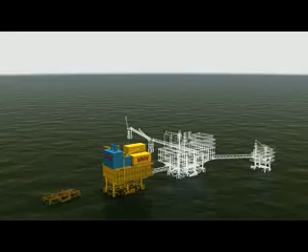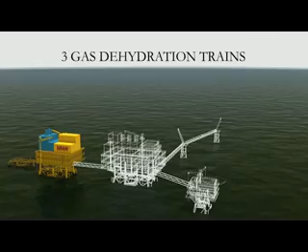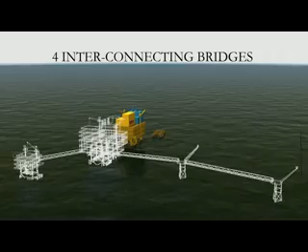Process Platform and Living Quarters Project, consisting of one process platform with all the major facilities for oil, gas and water separation, one living quarters platform for 150 men, 3 process gas compressor modules integrated in MNP platform, 3 gas dehydration trains, 1 gas sweetening unit, 2 flare towers for flaring HP, LP and acid gas, all utility systems such as instrument air, nitrogen, diesel, etc. to meet the process, safety and operational requirements, 4 interconnecting bridges, associated modifications in the existing MNW platform.

The overall project schedule was 33 months for the complete engineering, procurement, fabrication, transportation, installation, commissioning and handover. The project had to be completed on time without compromising on the strict safety requirements and operability criteria set by ONGC. Is it possible to meet customers' requirements and fulfill project timelines? Possible? L&T took up the challenge in July 2009.

Is the project execution plan frozen? No. Are you serious? Still, there are some engineering options we need to study. It's impractical to execute the project in its completeness in a schedule of 33 months. It is impossible. Yes, it's possible.

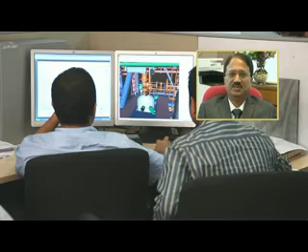First, you have to believe in yourself. When you believe in yourself, you will start planning. Planning brings in engineering strategy along with onboarding of your crack team. Strategy translates into action, action into results. Multi-locational approach, IT, collaboration and interface management. Innovation and creativity are the cornerstone of this world-class engineering.

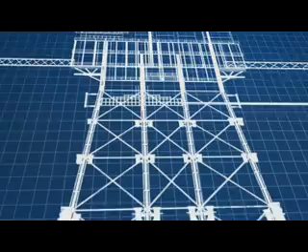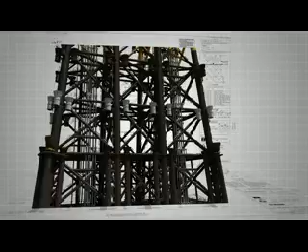The project milestone had 2 major requirements: jackets installation, 19 months, topsides completion and handover, 33 months. The first major part of the project requirement was the jackets design finalization. All the jackets had to be installed 12 months ahead of topsides. This required the topsides design, that is layout, weight, etc., to be finalized upfront. Only minor changes could be accommodated later. The main challenge of the project: extended feed verification and the detailed engineering of the MHN complex translated itself into multi-dimensional challenges for all the engineering disciplines.

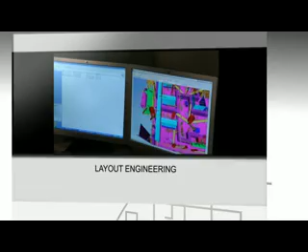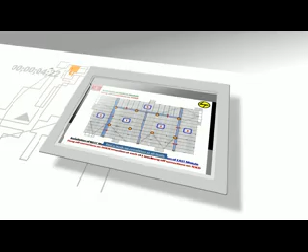The layout engineering had to be finalized at the start of the project itself, keeping in view the changes that might come at a later date, whether it is safety study requirements or final vendor data. The other disciplines, mechanical, electrical and instrumentation engineering, had to monitor the vendor data all the time from day one, critically reviewing the changes that might arise due to their own engineering requirements as well as that of their vendors, to update the key documents like weight control report, which plays a significant role in jacket and layout design.

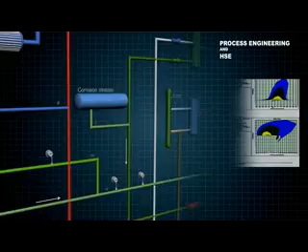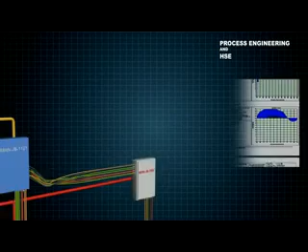The 2 important disciplines, the process engineering and HSE, had to finalize all the design data as well as the deliverables at the earliest. Process engineering was the first discipline to come online to define the technical requirements to other engineering groups involved in the project. This set the rhythm of the project. A multiple number of technical clarifications, around 5 volumes, had to be converted to design basis and other philosophy documents such as isolation philosophy, control philosophy, ESD and blowdown philosophy.

The first and foremost activity was to freeze the feed requirements very quickly. Sizing calculations had to be completed. Electrical loads had to be frozen, including various scenarios such as black startup, restart and emergency loads. Package specs had to be defined. Material of construction had to be confirmed. All the philosophy documents, PFDs, P&I diagrams had to be finalized at the beginning itself, including vendor items.

HSE documents such as hazardous area classification inputs, flare radiation and dispersion study reports, and all the safety studies workshops such as HAZID, HAZOP, SIL, QRA, etc. had to be performed in time so that the outcome of those workshops did not alter the jacket and layout design adversely. No major changes were allowed as it would affect the layout and hence jacket's design.

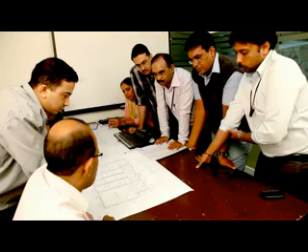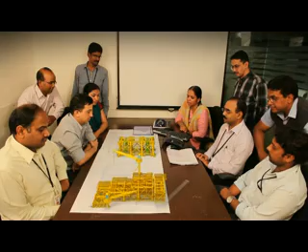The layout team had to work hand in hand with process, mechanical, instrumentation and electrical teams to establish a layout configuration that was optimized to meet the jacket design. Layout should not change later but should meet the safety criteria as specified by international codes and standards and local regulations. The MNP project took shape in the mind's eye as the team worked in unison, building on its expertise, experience and commitment, setting benchmarks in teamwork and timely delivery while meeting the deadline set by ONGC.

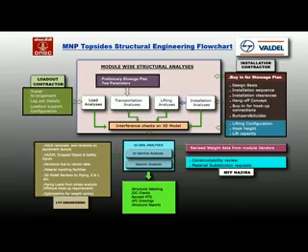Normally, jackets are designed based on frozen inputs for topsides. However, in this project, engineering had to be done based on limited data. Precise and robust engineering calculations had to be performed so that only minor changes could be absorbed in the jacket design. The first major achievement for L&T-Valdel, that was a great feat.

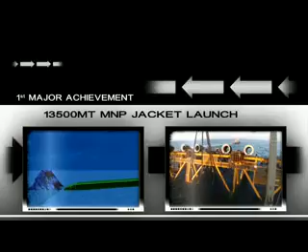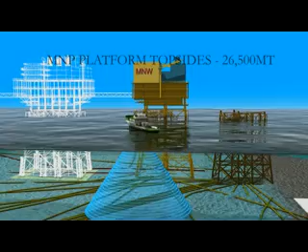The next part of the project was to finalize the topsides design and installation requirements. The non-availability of the installation weather window and the unfavorable field layout of Mumbai High North with the added complexity of the pre-installed risers made the installation of topsides decks by float-over method impractical. Layout had to be carefully planned and finalized as the offshore installation of topsides decks called for a spliced concept, that is, module-wise installation of southwest, southeast, east, north and west, which would be placed on the jacket that was already installed.

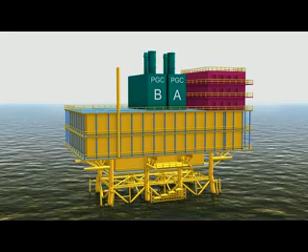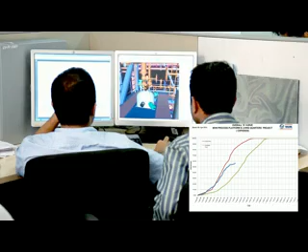Interface engineering was one of the key factors in the design and essential for the successful implementation of the project. Communication failure could cause delays and errors, leading to the disruption of the project objectives. Piping team had to work very diligently, studying as many as 15 layout options to suit the jacket that was already installed, as well as meeting the installation sequence of topsides decks. Piping team worked along with other engineering disciplines such as instrumentation, electrical, mechanical, structural and process to freeze and finalize the layout design.

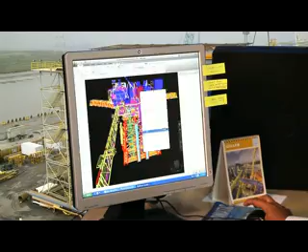The electrical lamps were never switched off in L&T-Valdel Engineering Ltd as the team worked round the clock. The various hands of the project working together achieved the great task. We achieved a seamless integration of basic and detailed engineering activities by L&T's multi-centered engineering task force teams. Close coordination with numerous external agencies and vendors along with the ONGC PMT team, with a single objective to deliver and demonstrate the world the capability in executing such mammoth projects having multi-dimensional complexities with striking commitment to the project goals.